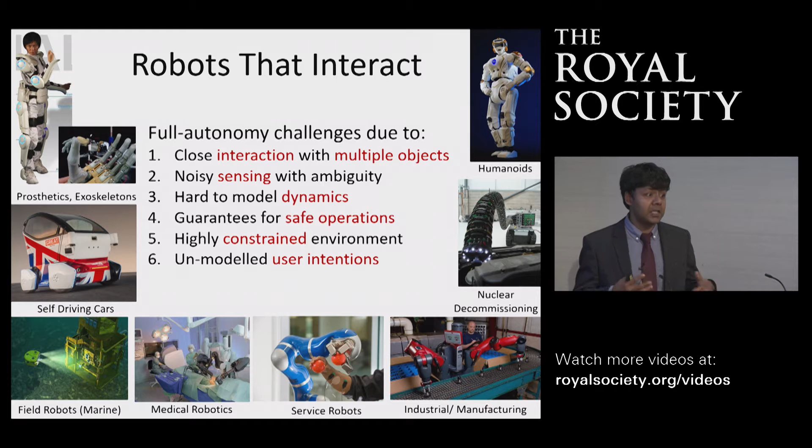There are three things I want to focus on. One is about sensing and representing the world around you. The second is about having safe interactions, so robots that interact safely. The third is to do with learning, prediction, and adaptation, which is what Andrew just talked about. So let's start with understanding and representing the world around you.

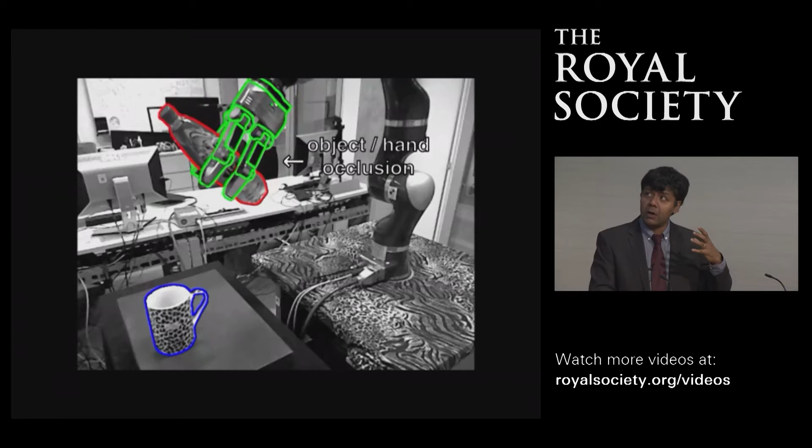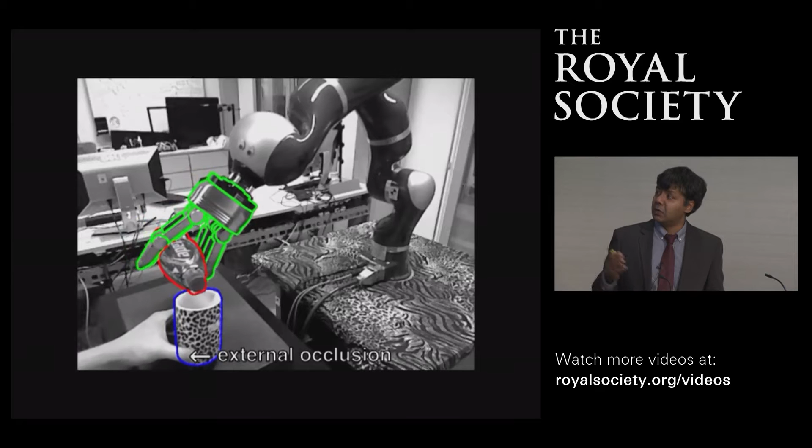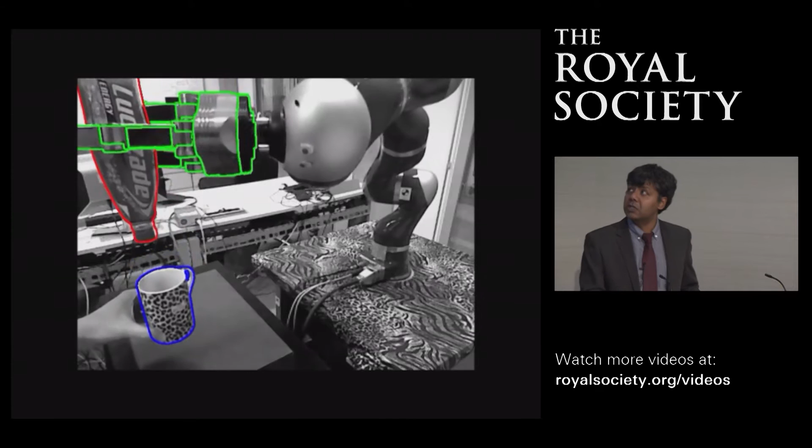Here's a quick video of some work from our lab on real-time object pose tracking and recognition under quite severe conditions of occlusion, object and hand occlusion, and eventually out of the camera's range, the depth camera, with external occlusions of the objects you're trying to track. This is visual servoing, for example, under these rather severe conditions, but you'll also see in a moment that, as with all autonomous robots, you will not have cameras that are on a fixed basis.

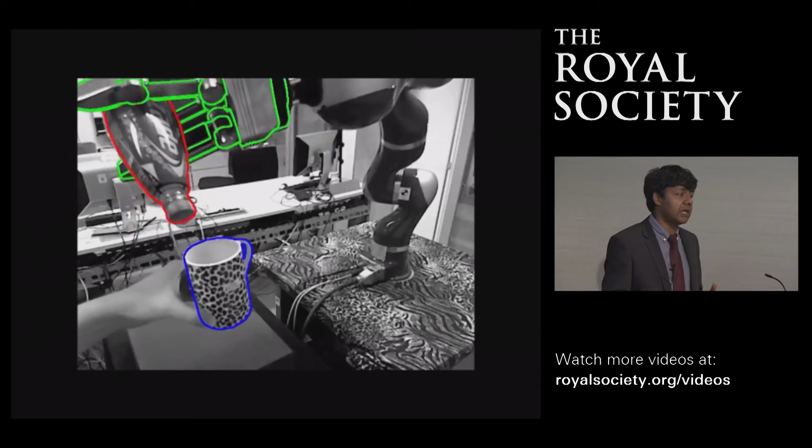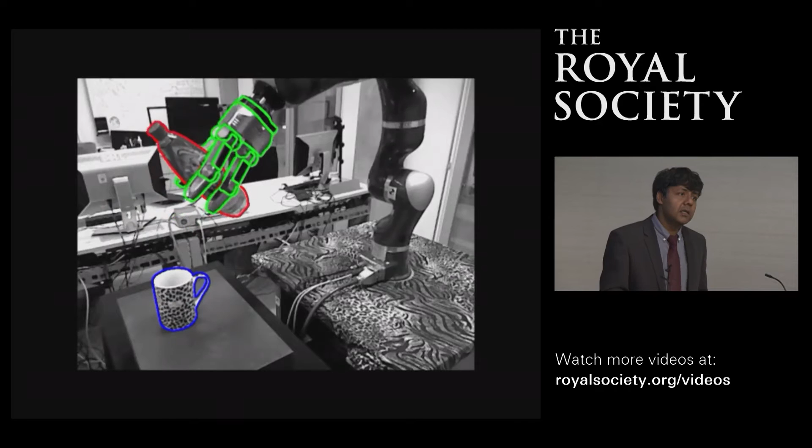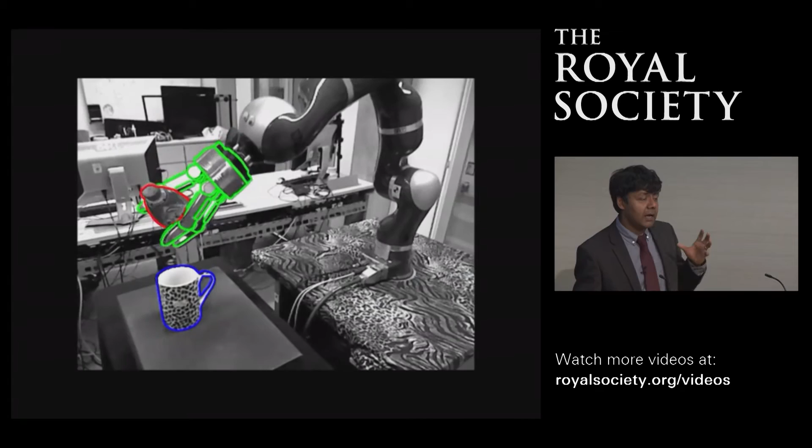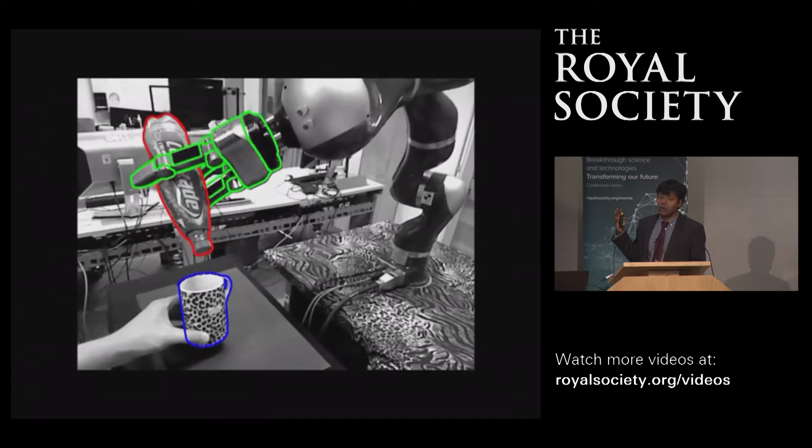The cameras themselves move, so you need to be able to do robust tracking and calibration under circumstances where the camera itself moves. In a moment you'll see the same sort of visual servoing happening with motion of the camera in the picture. The underlying technology behind that involves machine learning and data-driven techniques to understand what it takes to do robust tracking under occlusion, under motion, and in a very cluttered environment.

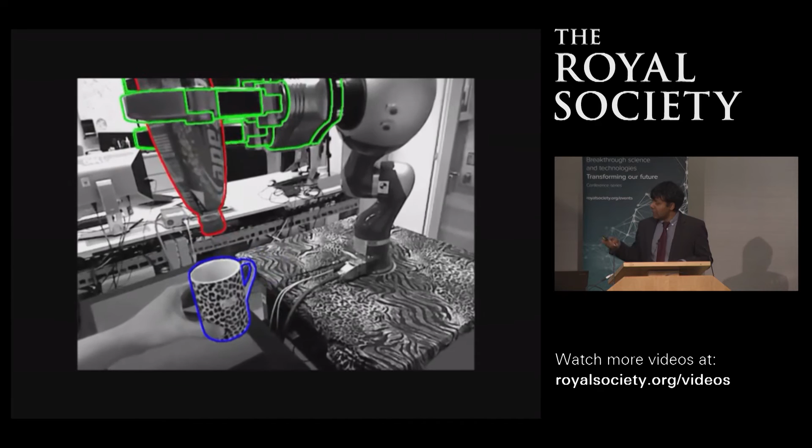Where can this possibly be relevant? This can be relevant in scenarios like Toyota's Human Support Robot system, where the idea is you want a robot to really be a co-helper, in this case in a feeding scenario. It's not enough to just create a raw percept tracking on its own; you really need to create a unified percept of the world around you. In other words, really interpreting the scene around you.

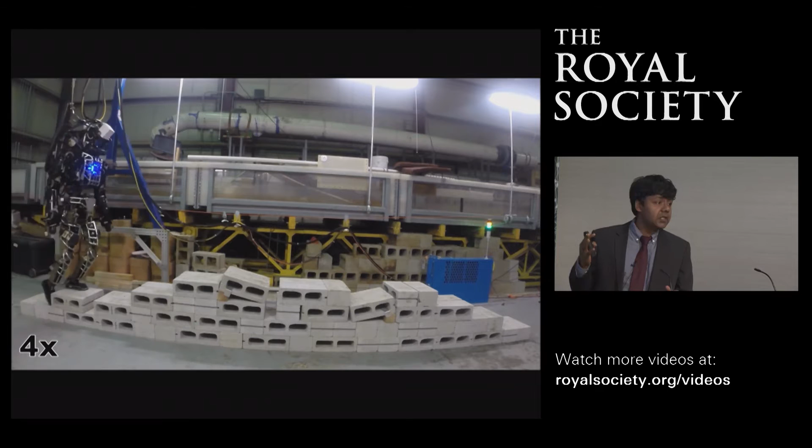One example of work we've done in collaboration with the MIT DRC team is taking raw sensor data, things like LiDARs, depth sensors, and camera sensors, and really mapping the world and doing control on top of it. The next video applies this technology to control of a fully autonomous humanoid robot, and as you probably recognize, it's the Atlas.

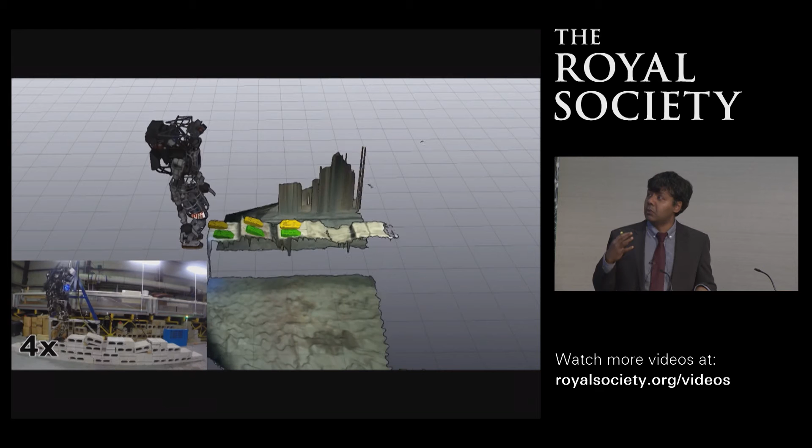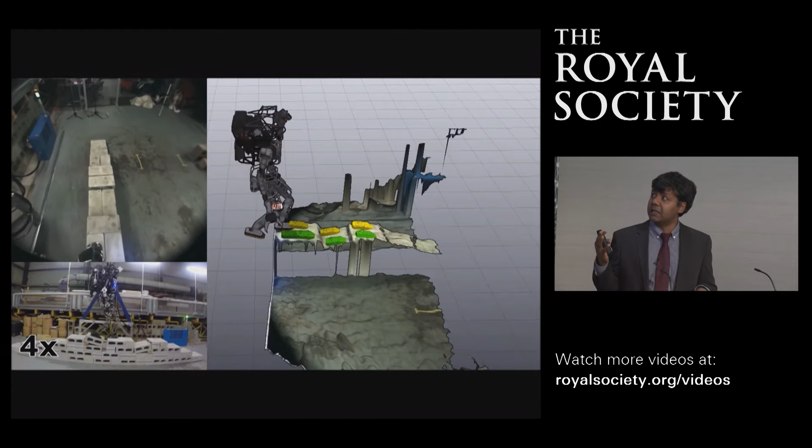The idea is you want to be able to locally track the world around you, figure out what the footsteps are, and feed it back in real time in terms of the planning and the feedback control, all with this kind of rather impoverished view of the world.

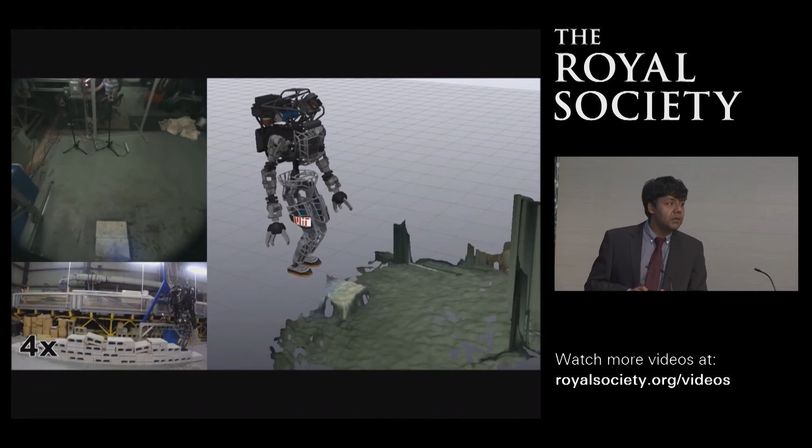This is a big challenge, and we are seeing solutions. I'm not saying this works in all circumstances, but we're getting to a stage where we can map complex scenes, plan ahead, and apply machine learning techniques to achieve this closed loop behavior. In this case it can be simple things, baby steps literally.

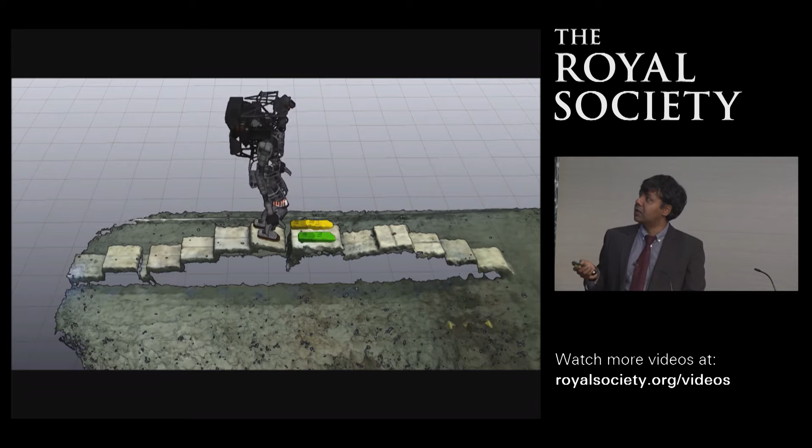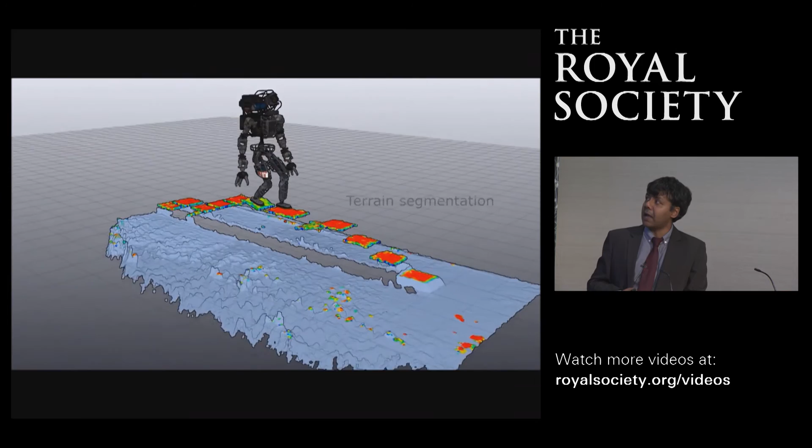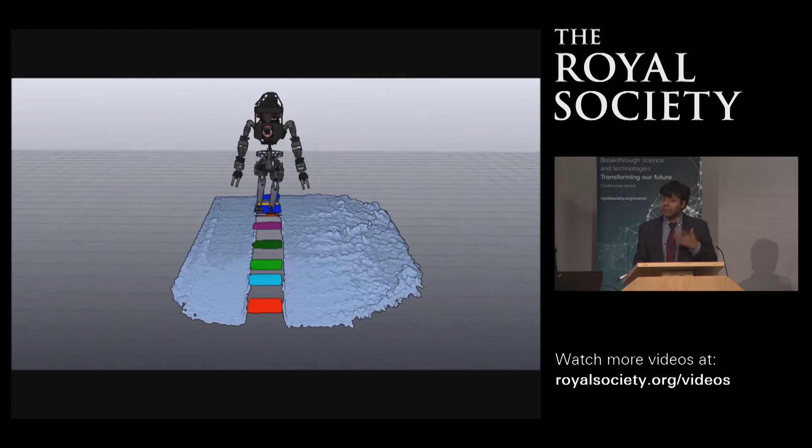Like figuring out the three-step look-ahead plan, taking terrain segmentation from sensing, using a good clustering algorithm, doing some clustering and segmentation, and in the end, footstep placement for navigation. This is where we really want to push the boundary of sensing all the way to actual control in the loop kind of scenarios.

The other important thing for understanding and representing the world around you is to talk the same language. Sensors have a certain kind of language: pixels, depth maps. You and I communicate in very different ways, using things like 'I want to put this on top of the table' or 'I want to put this under the object.' So how do you bridge this representation? One key is looking at representations that capture the essence of what it means to do a particular task.

I won't go into all the details, but we work with things like interaction mesh-based relational descriptors. I'll show you a quick video that illustrates that point.

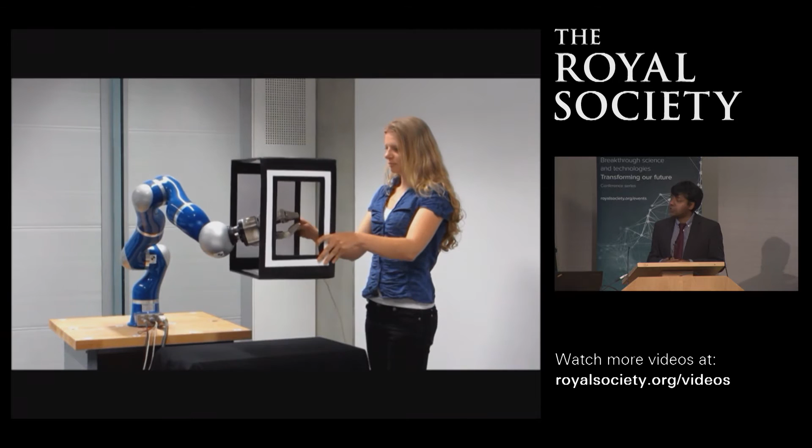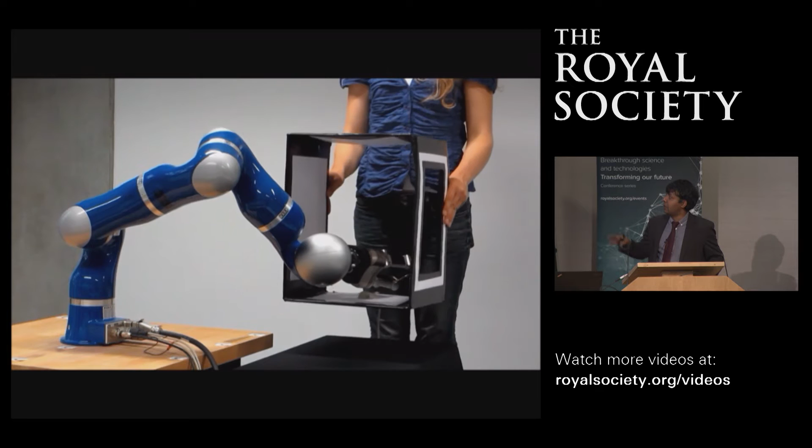Here's an example of asking a robot arm to reach inside a box. You can specify it using X, Y, and Z, but the point is, if you use relational descriptors and topology-based descriptors, then the concept of inside and outside a box moves with the box. Hence you can very quickly readapt and change the behavior of an object you're tracking without explicitly encoding collision avoidance. As long as the hand is inside the box, it doesn't care that it's in the center of the box, because that's not the specification. So here's an example of how you can use interesting representations to do clever, fast things.

Now, in spite of good representations, you will always have the situation—Andrew mentioned uncertainty, probabilistic inference—you will have uncertainty in the world, and that's the nature of the real world. To be able to deal with uncertainty, one of the many approaches we've taken is to look at actuation systems, fundamental actuation systems, and work with compliant actuation systems.

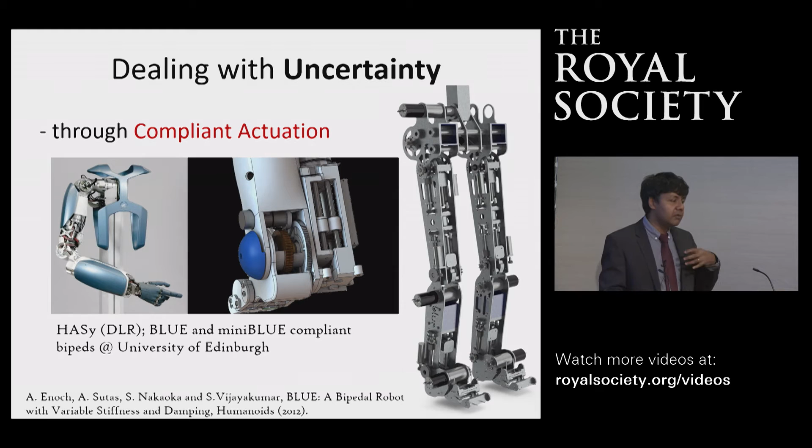So in layman terms, it's springs in between your motor and your end effector. That's great, but the problem is controlling such things. The moment you put those in, controlling them becomes really, really hard. So we've been developing algorithms that are able to do that, combined with efficient representations, to achieve a good level of optimal control with compliant actuation systems. So why is this important?

David had an example early on about manipulating a valve underwater. Great example - if you're not compliant, then you probably won't succeed.

Something closer to what I do - we work with a lot of exoskeleton systems, for supporting the human body, for augmenting power, for rehabilitation purposes. This is an example of an exoskeleton from Cyberdyne in Japan, and it should not have a mind of its own.

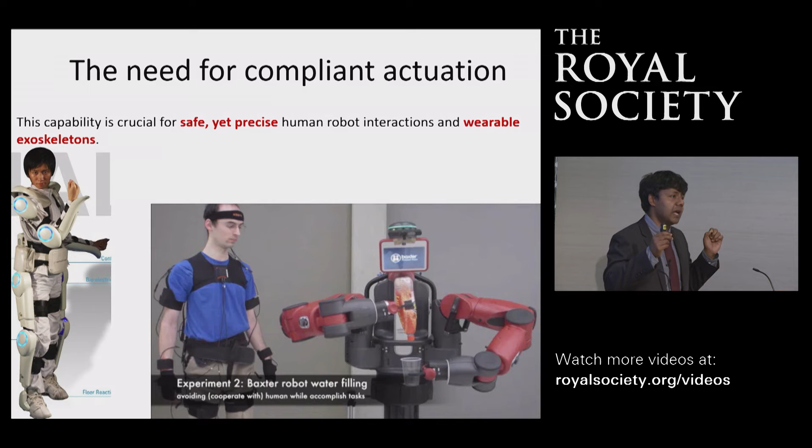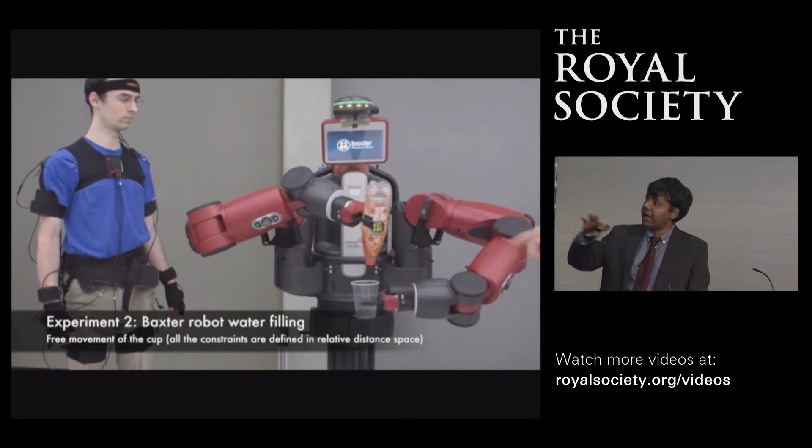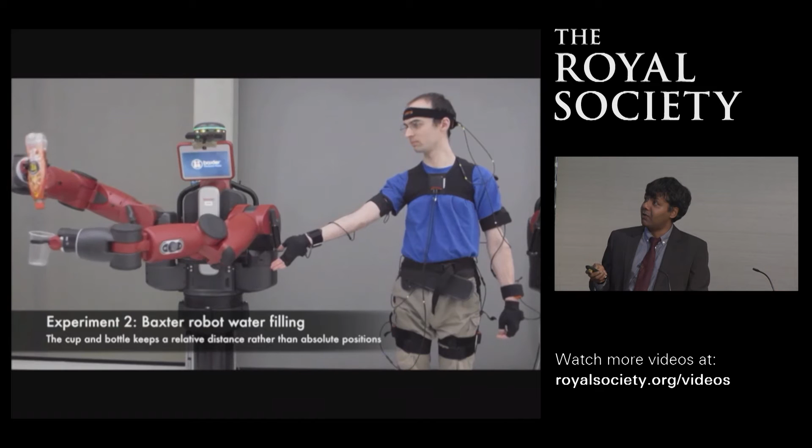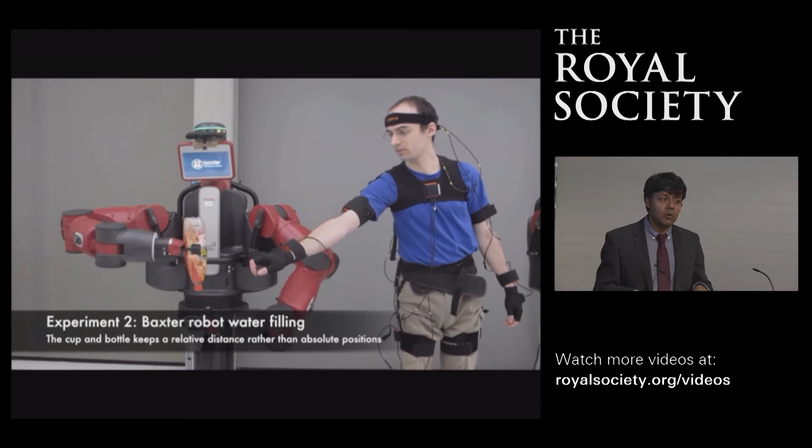So you need a system which really works with you. If you take that idea, I want to show you a little video which combines the concept of clever representations with human-in-the-loop compliant actuation. This is a Baxter robot, tasked with a primary task. This is compliant actuation here - it's able to adapt to a human in the loop. While a person tries to interact with it, it's able to adapt its motion while still maintaining the primary goal, more or less, of keeping the bottle above the glass. This is an example of real-time human interaction in the loop while compliant actuation aids us with this safety net.

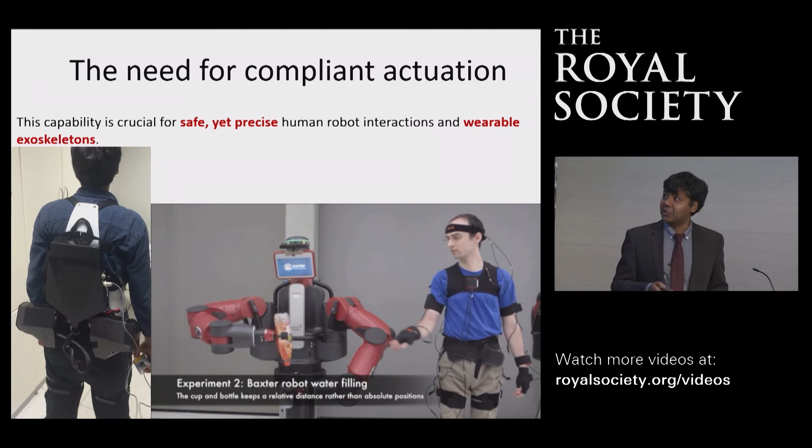This is not just a picture I put up - that's me wearing one of those exoskeletons. If things don't work, my health is at risk. So we do real patient trials with human patients using these exoskeletons. This is actually an active pelvis orthosis.

The last bit of technology I want to focus on is something close to what Andrew talked about - the key ability of people to predict consequences, task goals, and intentions. We need systems that are able to adapt and change to novel situations, novel circumstances.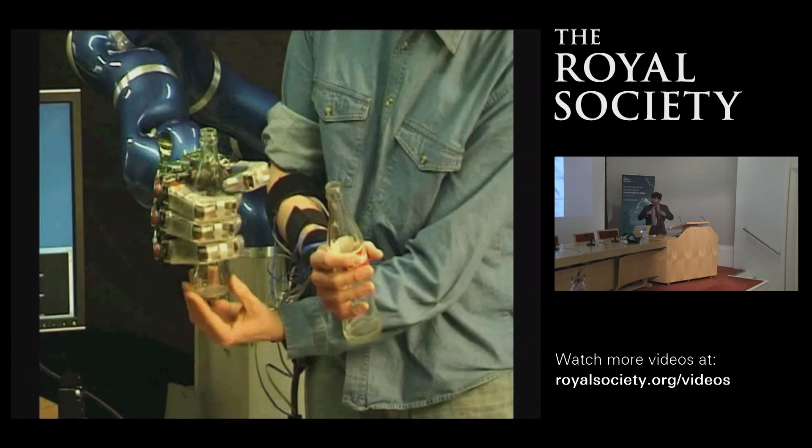The last bit I want to finish with is to show you a little on the DRC and the SRC. Just a note that this is an example of a successful partnership between a rather small company, an SME called Touch Bionics, just off Livingston, and the University of Edinburgh. It's a good example of where things go right.

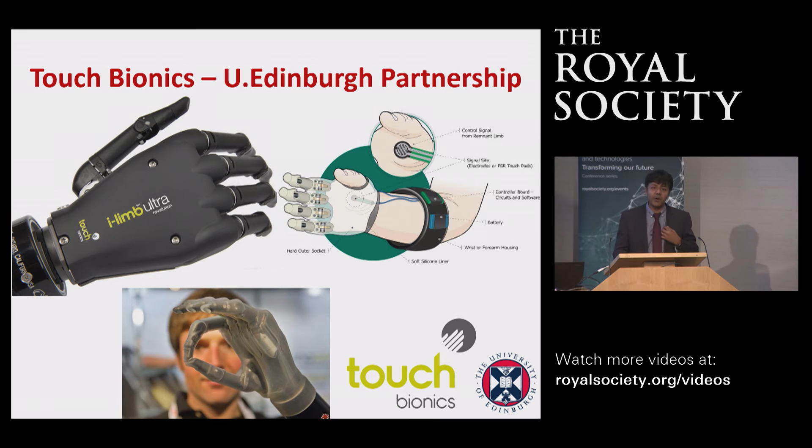As probably most of you know, there was the DARPA Robotics Challenge, similar to the autonomous driving cars challenge. A lot of the success has been attributed to the first challenge DARPA did. Now they had a similar thing for humanoid robots. The challenge was to drive a vehicle, dismount, do some tasks, and climb a ladder. So it was exciting.

But the reality was that a lot of the robots did reasonably well, but there was a whole team of people underneath the hood doing more or less teleoperation. So the idea is, how can we push the autonomy slider a bit more so that we still have a human in the loop, but do this quite a lot more autonomously, a lot more robustly?

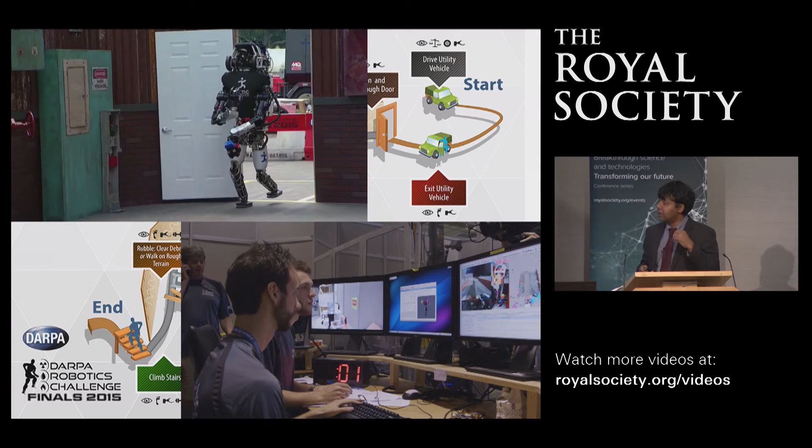The UK Hub of Humanoid Research and Space Robotics Challenge, especially we had a first sandpit with multiple universities - King's College, Imperial, Birmingham Labs - and this is an open call for everybody else to participate. So what was this challenge about?

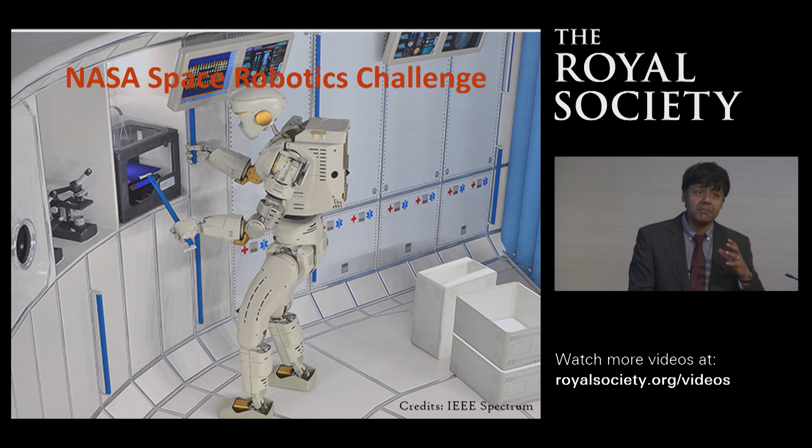The NASA challenge is about getting unmanned missions at much cheaper cost. They have this vision of robots doing things like spacewalks, and Rob Ambrose said that if Columbus had the vision, he would have sent a robot ahead to set up his landing team. The only problem is he would have had to answer the question: where is America, and what is a robot?

Anyway, so last slide - this work that I've just talked about, mostly focusing on motion synthesis for robots in contact-rich environments, has just this one topic, but has a capability to interact or create interactions across domains with academic partners, with industrial partners, with companies small and large. So this is just one example of a successful partnership happening between universities and, in this case, my research team. But there are lots of examples out there. So this is just a call to say that we should work closer and with much more. We would do much more if we are able to do that.